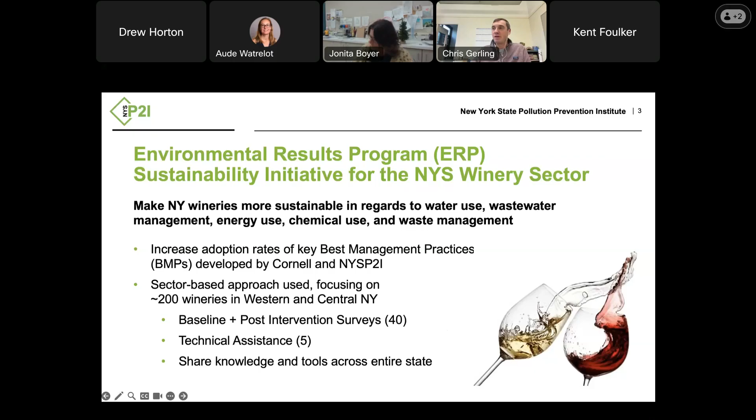And so the end product is this workbook, as you can see. Here's a hard copy version of it. It's supposed to provide key best management practices that can help you with lowering your costs, reducing environmental impacts, saving resources, and demonstrating your responsibility. It's supposed to be a tool you can use to help with everything from production to marketing.

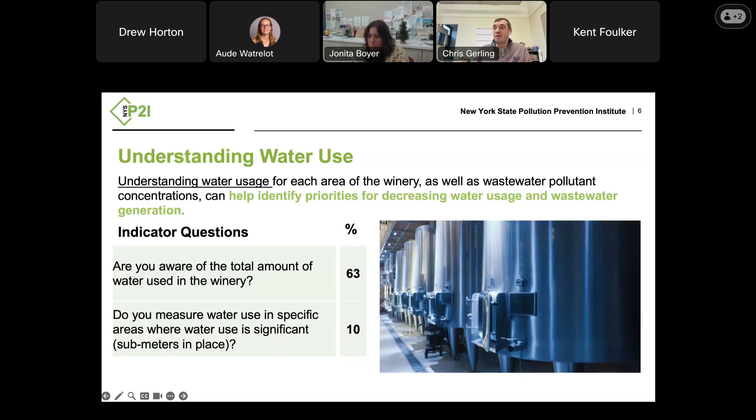And once you start with this kind of measurement, you can get a lot of information relatively easily. Same thing for energy, right? Everyone gets an energy bill, an electricity bill generally, and most people know where the hogs are. We know it's the compressor for the chiller, we know it's the bottling line. There are certain uses where we know we're using a lot of energy kind of intuitively, but have you ever really stopped to think about how much you're using, for this job, for this task, for this amount of time? And as you can see with our surveying, nobody is doing real sub-metering with electricity.

It's something that, once again, that information could help you figure out. I'm not sure how it works where you are, but where we are, we have what we call demand charges for your utility bill. Basically, for most commercial operations, they take your peak demand and start to bill you based on that usage. So knowing what those peaks are, and when they are, and what you can do about those peaks, can have a dramatic effect on your electricity bill, even if it's relatively rare that you're doing these things. That still may be how your utility has made your bill. So those are things to be aware of.

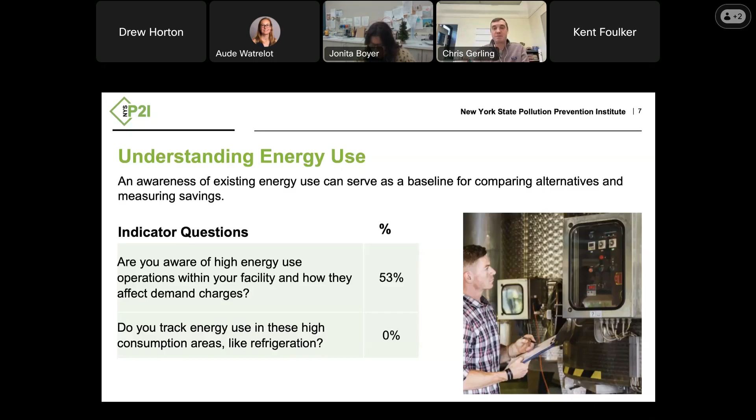Once you get to knowing what you're doing and what you're using, there are some very basic things you can do, including insulation and basic kinds of things that are passive, inexpensive, and save the energy you're using. Our workbook shows more specific things about this, but just insulating the cold can help you save significant amounts of energy.

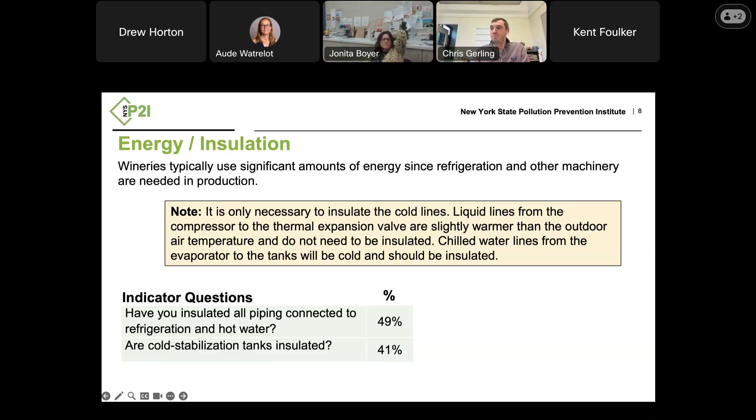Maintenance is another key area. We're not talking about needing some kind of hydrogen fuel cell system to be more sustainable. You don't have to invest lots of money in some advanced system. Insulation and maintenance, just making sure your chillers and cooling systems are free of obstruction, routinely vacuuming to prevent dust accumulation. This is low-hanging fruit. These are easy things everybody can do. It doesn't require major investment or advanced systems.

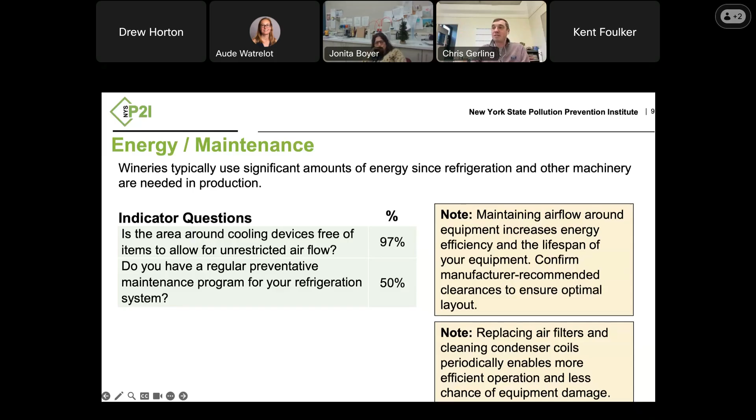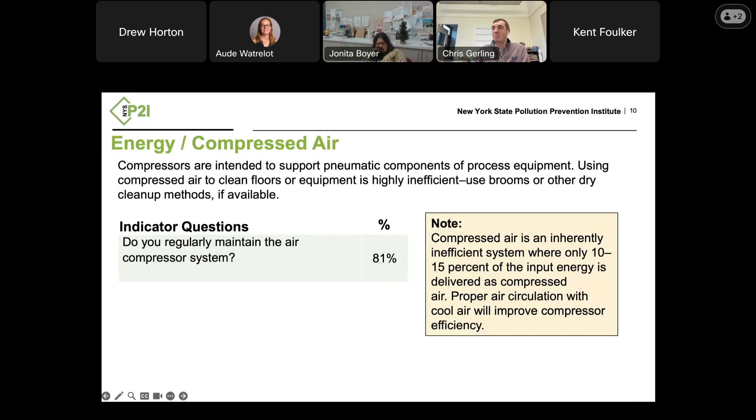I know everybody's busy, and as we were getting introduced to our panel, most of you wear way more than one hat at your business, so these things can easily slip your mind. But it doesn't have to be that complex. Compressed air is a similar situation - maintain the compressor. Compressors are not efficient, so not using them whenever possible is the best idea, but if you make sure they're well maintained, that's the next best thing.

LED lighting - most everybody's done that now. It's kind of old news, but it can still dramatically lower your energy bills. Make sure you use timers if possible, motion detectors. I know most wineries in my area and yours probably don't have a third shift with 50 people in the space. When you're there, you turn on a light; when you're gone, you turn it off. But just things to think about. Programmable HVAC thermostats - easy things to do that don't necessarily require thousands of dollars of investment over the years.

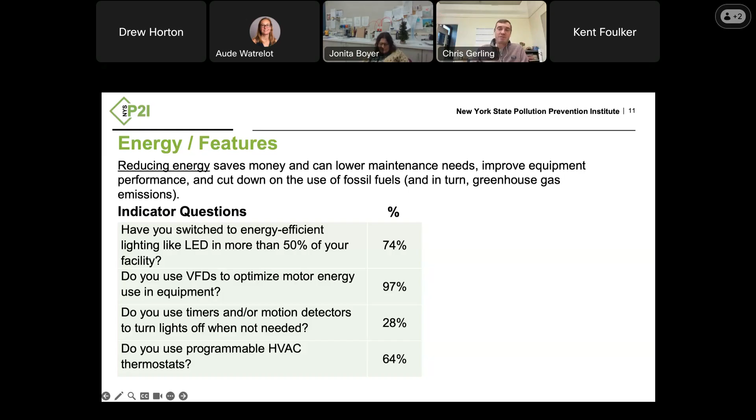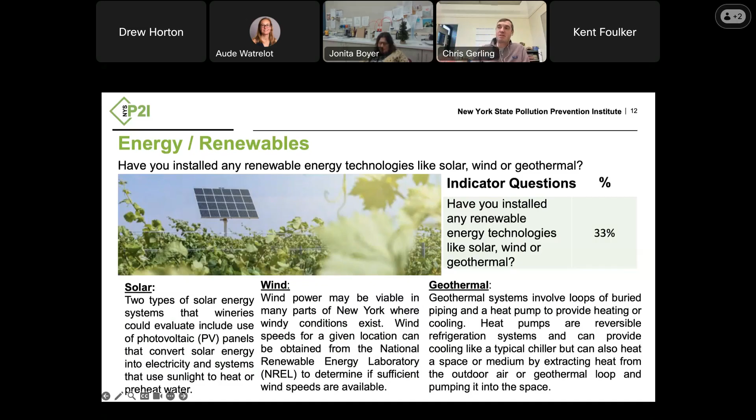Renewables are great if you have access to them - there's usually pretty good incentives from lots of different places. The states do them, the utilities do them. So if you can put in solar or wind, those are really good. Geothermal can sometimes be a little less suited to the winery environment. Some people use it, but it's definitely an option you can consider.

Now, actual winemaking processes - some things we recommend in our workbook, something that Aude and I have talked about a lot and done trials with, is instead of having to pay for utilities, use cold for cold stabilization. Have you looked at possibly some tartrate precipitation inhibitors and things like Zenith you may have heard of? Those can provide an option. A lot of places where maybe wineries listening today are located, you can use the outside to do some free cold stabilization - people do that in our neck of the woods.

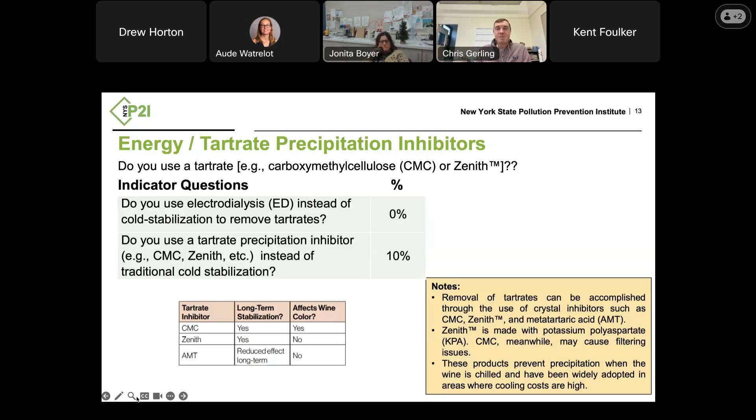Sometimes you don't get the conditions you need at the time you need them, but it is an option. Using these products can also be a choice. Nobody's using electrodialysis in this part of the country because those systems are very expensive and very large scale, so we weren't surprised nobody said yes to that. But these inhibitors, Zenith and its family of products, are becoming more widespread, pretty easy to use, and can be quite effective - there are some wines where they're less effective, but on many wines they can be a good choice.

We're going to talk more about this later, but when you have your pomace, your tartrates, your sludge, your stems and seeds, all these different things, what are you doing with them? The worst thing is to actually throw it in the trash or a landfill. The next thing most people do is just compost them, spreading on the land, and that's not a bad use depending on your situation and layout.

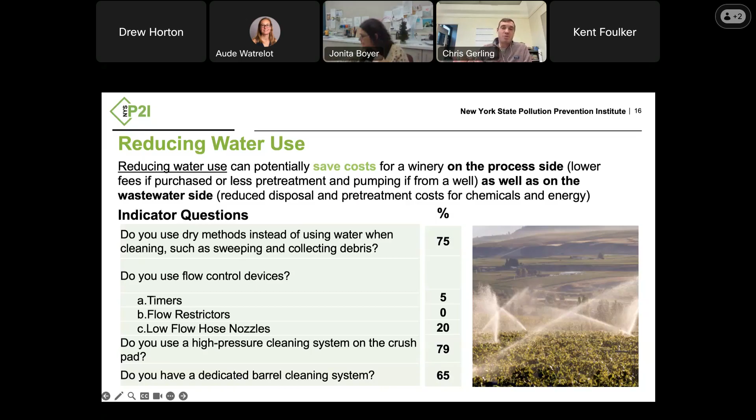Chemical use - making sure we're being prudent with our detergents and sanitizers. One thing we'd love to recommend: if you have a tank where you're doing a final rinse, and you've already put all the chemicals in, gotten all the solids out, and now you're just doing a final rinse - maybe rinsing out a detergent or sanitizer, and that water is almost pristine - can that be your first rinse in a dirty tank? It takes a little infrastructure and planning, and you need two tanks that are dirty at the same time, but if you can do that, what a great use for the water.

Using predetermined amounts of water versus just using as much as it takes, which is what most of us do, me included - I know from working in a winery what has to happen. Using test strips to measure our concentrations - why is that a sustainability thing? Well, maybe you bought a big drum of detergent and kept it around for a year plus, and you're thinking maybe it's starting to go bad - should I just throw that out? What if you had a test strip to measure the concentration? Now you can figure out, okay, I need to add 10% or 15% more to get to the same concentration as before, and I don't have to throw out the tub - I can keep it longer. Things like that. Also rotating chemicals - we often in the wine industry get our go-to and just use the same one over and over again.

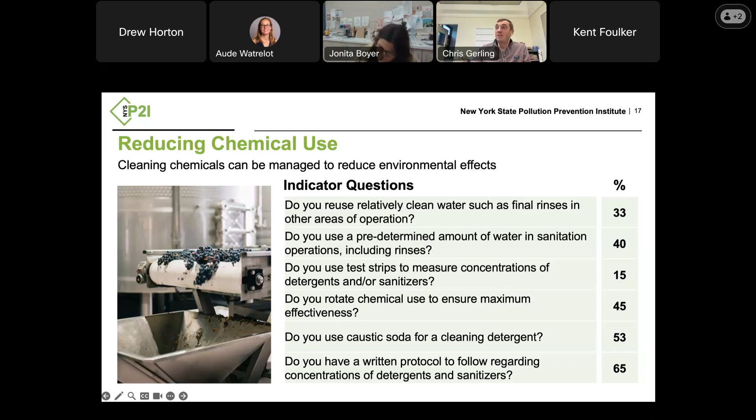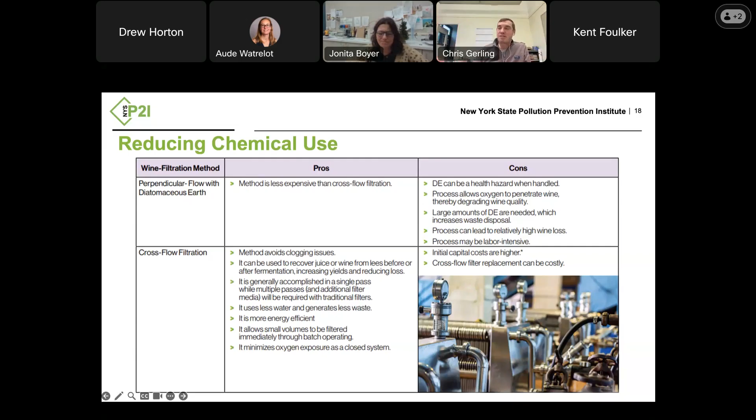Cross-flow filtration is a great option. They're getting smaller and cheaper every year, and hopefully they will eventually find their way out to every small winery, because they're just a great way to go. As you can see on the pros and cons chart, they are efficient, they're often self-cleaning, they use less water, and they generate less waste. So it's a great option to consider.

All right, I think it is time to hand off to Sara.

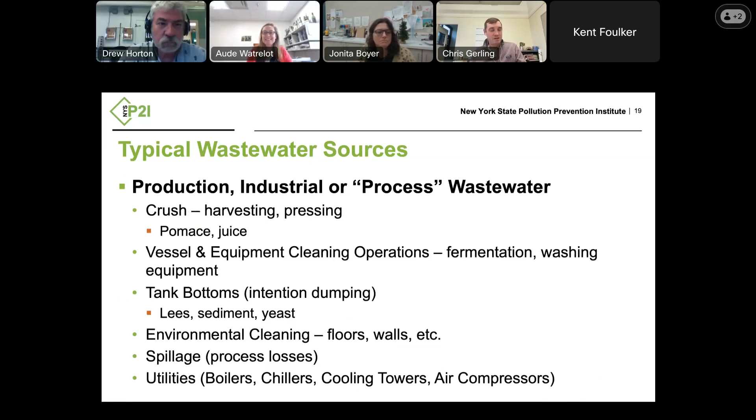Whoops. Thank you, Chris. Yeah. Let me change the role. And let me introduce you, Sara.

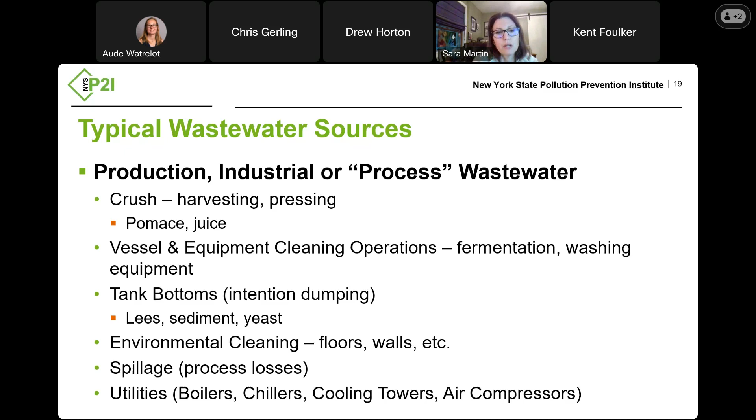The ones you don't think about, which as wineries grow more into places for people to come do festivals, and people like to get out and have glasses of wine, it's kind of become more of a social event.

What a lot of wineries that we're finding are struggling more with is the people waste or the restaurant waste, especially if they have large events where they can go from using say 3,000 gallons a day to 6,000 gallons a day. There also are restaurants, which typically can have a lot of oil and grease, food solids, and higher strength waste associated with food production. So these are ones you don't think about until you start growing and getting more people coming, which is a good thing, but also it can be a tough thing in the wastewater area.

So waste to minimize. We talked about wastewater having different components. Typically you want to keep as much high strength waste out of that. High strength waste we define as the actual wine itself, or the pomace, or any sort of food or organic material we tend to say is a higher strength waste.

To put it in perspective, a juice is typically 100 to 200,000 BOD. We use that as a measurement of organic strength in wastewater, whereas human stuff is typically 200 to 300. So you can just kind of get the order of magnitude of a glass of wine in organic strength versus what we typically produce at our households.

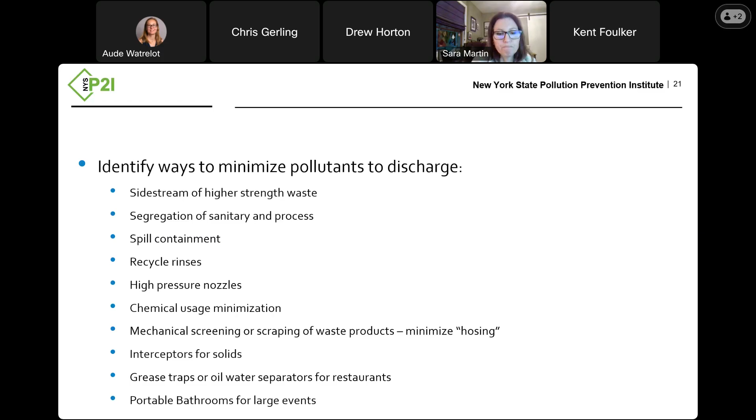So wastewater management was one that we talked about as part of our study, and a lot of wineries, as you can see by the numbers, didn't really have any treatment to manage their wastewater. A lot of wineries are still on septic systems that are getting antiquated, especially as they grow and more visitors come, taxing these existing subsurface treatment systems. And then one common question is: if I do want to treat it, how do I do that and where do I go?

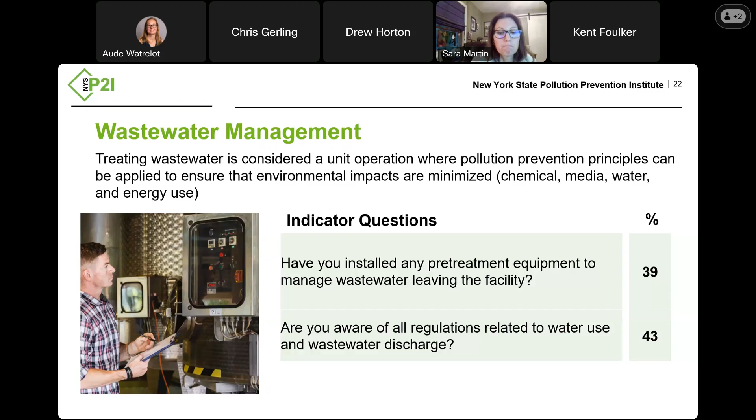So, part of where Chris led you to, we've come up with guidelines for managing winery wastewater. I'll go over the highlights here, but this is available on that same webpage Chris referred to. At the end of the day, once you have wastewater, there's only a few places it can go. It doesn't just disappear.

You could evaporate it, but it's very expensive, so you don't. Typically, most discharge to subsurface, especially if they're a smaller winery, they may have started off fine on a smaller septic system. As they grow, though, they have to find somewhere for this water to go.

Once it's treated, depending on your location, you could either do direct discharge to the environment, through an intermittent stream or small body of water, where you have to treat it to the quality of that water body before discharging it. This is typically pretty expensive treatment.

So the next layer down is looking for if you're near a sewer or some sort of municipal treatment plant. If you're not near one, you may consider hauling, depending on the volume of your wastewater, because there's no economy of scale at wastewater treatment for some of the smaller to medium-sized wineries.

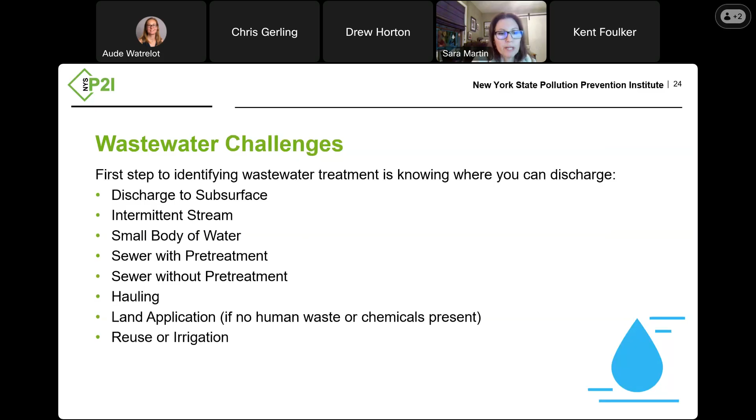Then you've got to start thinking, is there a sewer available, or a municipality nearby? What I found in most cases is that for a small to medium-sized winery, less than 10,000 gallons a day, maybe 5,000 gallons a day, you'd typically want to maybe even haul, get a collection tank and haul. It can be cost prohibitive to treat the smaller volumes of water.

But if you do not have a sewer available, then you consider segregating the sanitary waste at least, and trying to do maybe just a septic system on that, and treating your process wastewater separately. That allows you more options and disposal methods for the process wastewater versus the sanitary.

And if you have an existing septic system, it allows you not to overload it with the higher strength waste you get from the juices and the wine itself, which all have high organic content that can overload septic systems. They're really not designed for much more than human waste at the end of the day.

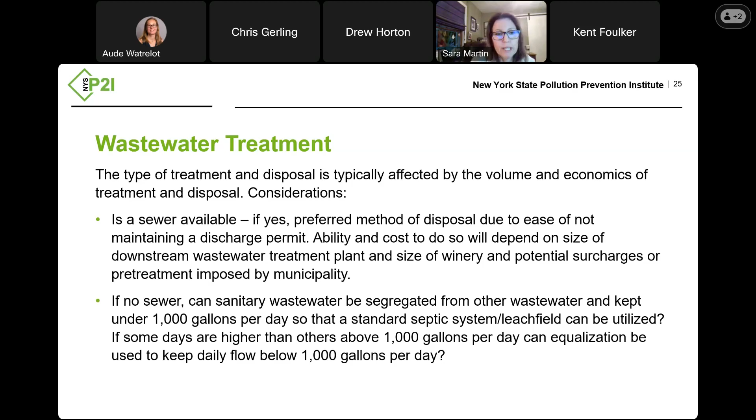If you are seasonal, you might consider temporary facilities, or again, hauling for peak season, depending on the seasonality of your winery. This may be a good option, so you don't have to build a huge treatment plant that's only utilized 25% of the time. We talked about the importance of segregation, and then doing a cost-benefit analysis of treatment versus trying to find a local wastewater treatment plant.

Basically, does the volume generated and the cost justify having to build yourself a treatment plant, with typical capital of $50,000 up to $500,000 depending on size, plus all the operation costs? It's not like you just push a button and the wastewater treats itself. You have to have operators operate all this equipment.

So if you're a smaller winery with, say, 4 or 5 employees, you might have to add at least another 1 to 2 just to operate your wastewater treatment plant. Again, it's a big problem statement as wineries grow, especially in our area, the Finger Lakes area. These are considerations they haven't had to think about before, where they're using septic systems for their wastewater essentially. They haven't had to think about it for a long time.

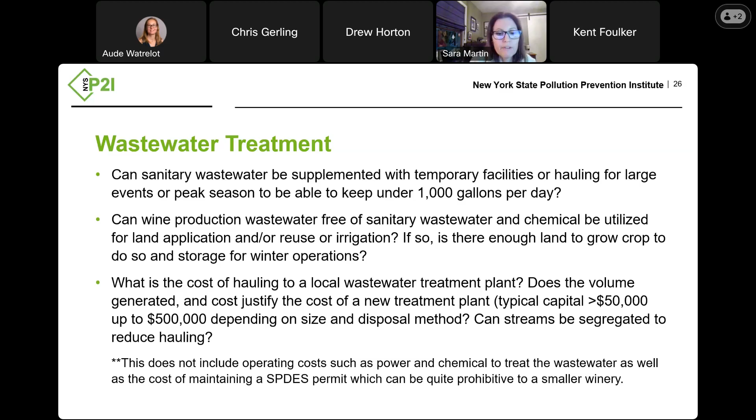If you're going to build a wastewater treatment plant, or make decisions about where it goes, you really need to do a proper basis of design to make these decisions. That is to understand your seasonality, and this is where Chris was talking about metering.

Understand your variability. Maybe 2 months a year you have 20,000 gallons a day and the rest of the months you have 5. That's a different problem statement than if you had 20,000 gallons a day every day throughout the year. Understand if you're going to do restaurant or hospitality there, because that makes some variable wastewater as well, and what kind of restaurant and hospitality you're going to do there also makes a big difference. If you're just going to do wine tasting and some light fare, that's probably not a big deal. But if you're serving meals and have a full-on restaurant, that can create quite a bit of wastewater in itself, or if you're ever planning to.

Understand quantity variability. Crushing season might be 2 months a year, so that might create a higher strength wastewater than other months of the year. So you may just think about hauling for 2 months a year, and then the rest of it is a lower strength wastewater, depending on your operations.

And then spills, we talked about, you have to understand chemicals. The reason I say that is a lot of times for the organic content, you have to have microbiology to treat the wastewater. Even septic systems use microbiology to treat the wastewater. And the reality is some of the chemicals that we use to kill the bugs up in the winery and to protect us and food safety can kill those bugs and render the treatment useless. So understanding, you should always minimize your chemicals just from a cost and sustainability perspective, but you should also minimize them from an impact to downstream wastewater treatment, especially if you're using microbiology.

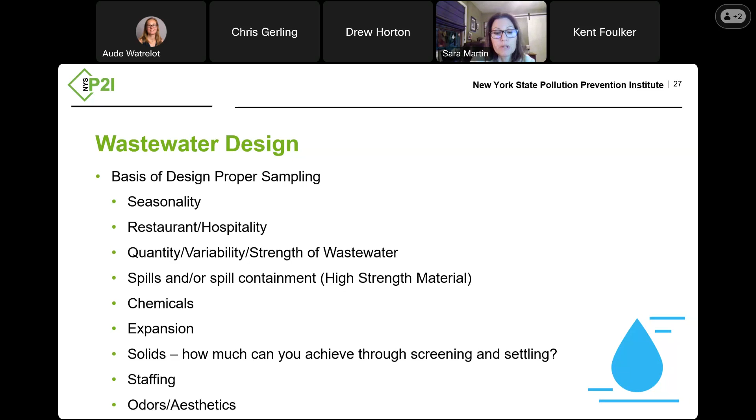And then always think about staffing, because these systems don't run themselves. So you've got to understand, if you're going to have to do treatment, you're going to have to actually operate it. And odors and aesthetics are a big one too. If you have people come into your winery, the last thing you want is for them to smell a wastewater treatment plant, especially with human waste, which can make them quite undesirable.

There's a lot of vendor solutions out there. Maybe I'm biased here, but I always engage engineering just to help. At least if you're going to go to a vendor-driven solution, have an engineer oversee it so they can ask all the right questions, make sure you have the right controls, aesthetics, and that they're giving you quality equipment and instrumentation.

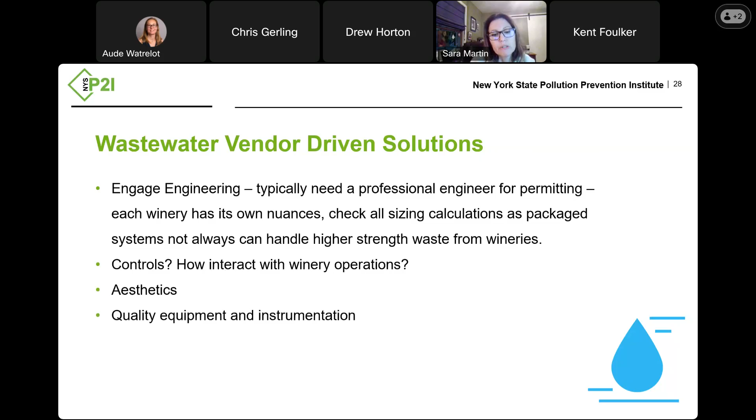Always work with your municipality. I told you the different ways to discharge, but always work with them upfront to understand what the rules of engagement are for yourself. It's hard to plan anything without knowing that. And sometimes you might find a good outlet just by talking to a state agency or municipality—they might have a solution for you that isn't you building a treatment plant.

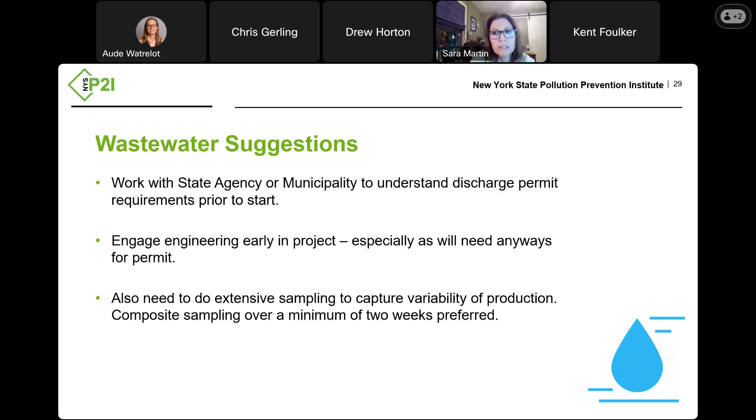Engage engineering early. Again, sometimes we think of things that you may not. And then make sure you do some sampling and capture the variability of your wastewater. I've seen people take one sample in design and they either end up with a completely oversized plant or a completely undersized wastewater treatment plant, and they spent all that capital basically for nothing. So just things to think about. And that is all I have.

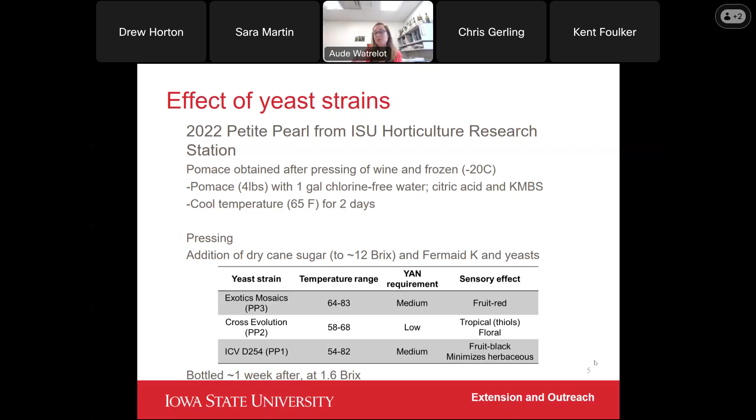So we tried 3 different yeasts, and bottled about 1 week after, at the end of fermentation. The fermentation was not complete, because we still wanted to have some sugar to allow fermentation and carbonation in the bottle.

Then we tried to evaluate the chemistry, which is always interesting to see in terms of those different parameters, and we also compared with sensory evaluation. Starting on the chemistry side, the pH was pretty low for the Petite Pearl made with 3 different yeast strains—PP1, PP2, PP3. PPB1 and PPB2 were a little bit higher in pH, and that's just how it was, since it wasn't exactly the same pomace.

You can see the ethanol concentration was pretty low, even lower than the range I mentioned of 4 to 9%—we were below that. We also checked the volatile acidity, or the amount of acetic acid we had. We didn't have too much acetic acid from a chemistry standpoint, and it wasn't perceived from a sensory standpoint either.

Looking at the color parameters, you can see that depending on the yeast or the pomace that was used, the hue was much higher when we used the Petite Pearl processed with Petite Pearl juice. That's probably because the hue was higher, meaning it was a little less pink, less red compared to the others, while the intensity was about the same. So there were no real differences between those conditions for color intensity.

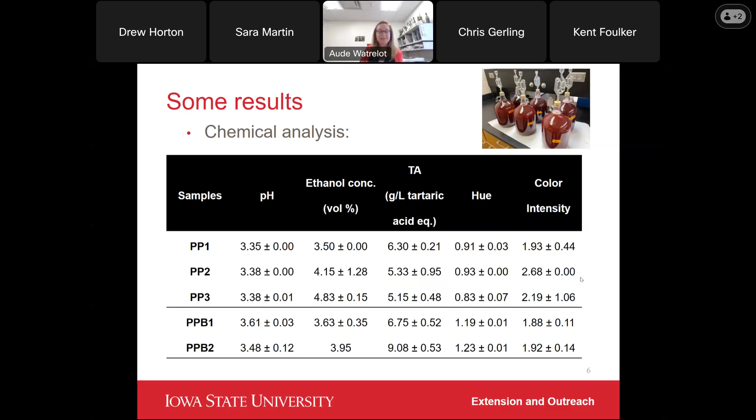As I mentioned, we wanted to see how consumers would accept those different piquettes. We provided the piquettes without saying they were made from pomace, because we didn't want consumers to be biased by knowing it came from a waste product. We just gave them the piquettes and asked what they preferred.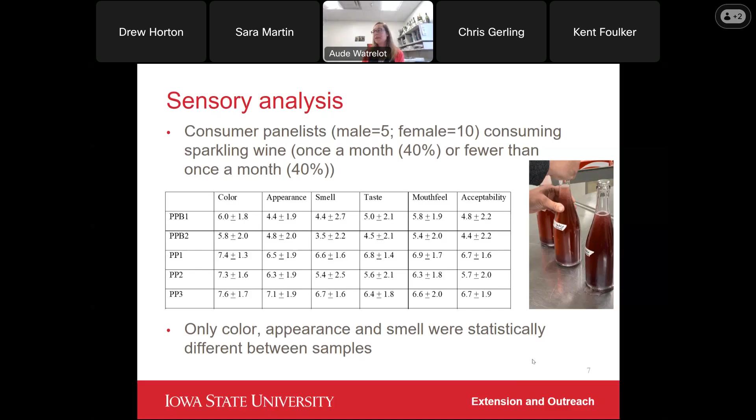We also asked how much they would pay if they were going to buy that piquette, just to get an idea of how much a piquette could be sold for. Overall, people always want to pay less for a product, but it was still interesting to see how much they'd be willing to pay for the different piquettes.

If you remember what I said about color and appearance, the first two Petite Pearl samples, with the different ratio of pomace to water, had color that was less pink and less red. That's likely why consumers were willing to pay less than $10 for those two, but for the other piquettes, they would pay between $20 to $25, or even more.

It was interesting to see the characteristics of those piquettes and how they were appreciated by consumers. One of the ratios we used was really not appealing - the color was pretty gray and brownish. That's what was mentioned in feedback.